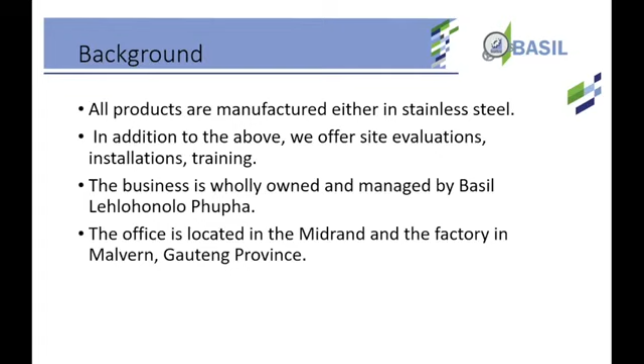I will go into the equipment and the opportunities there for the youth, because this equipment will unlock opportunities for youth, so that it can be demonstrated through agricultural institutions, self-help schemes, or through entrepreneurship.

I will start by presenting the poultry equipment that we manufacture. I will break it into three categories: breeding of poultry, egg production, and meat production.

In breeding equipment, we manufacture nest boxes placed in the breeding houses, and we also supply feeders and drinkers placed in the breeding houses, so the hens or chickens can lay their eggs in a good environment, and the clean eggs can be placed for hatching.

We also manufacture egg incubators in small and medium scale. These incubators are manufactured in galvanized steel, powder coated after, and have insulation. We've been manufacturing this equipment for quite some time. I personally have over 10 years in the industry, but I have people with over 30 years in this industry, so they can assure the equipment does what it's supposed to do.

We also manufacture chicken and quail abattoir equipment. This equipment can slaughter up to 1,000 chickens per day, and even more quails per day.

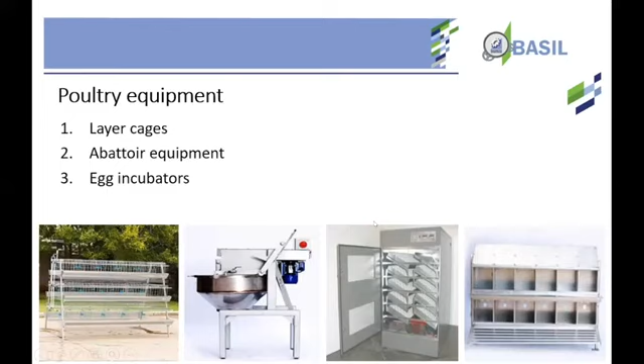I will play a small video clip that shows the chicken abattoir, the main equipment used in chicken abattoirs for small and medium scale farmers.

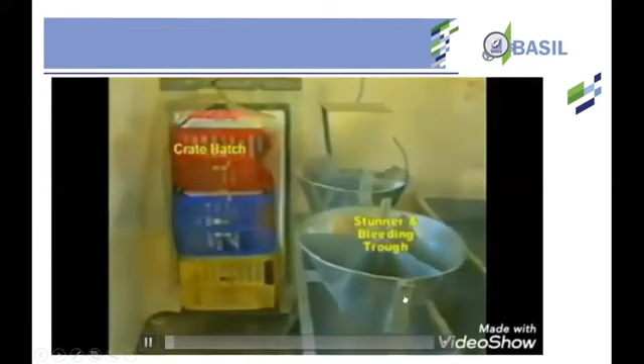So this is how the equipment looks. Here we have a stunner bleeder, a scalding tank, and a tilting bowl plucker.

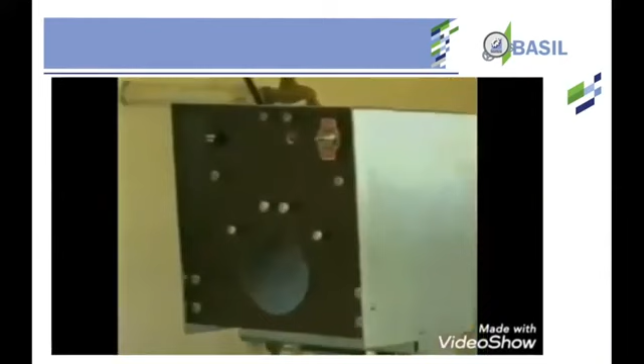The stunner bleeder is used in the chicken abattoir so that the chickens can be stunned. After they are slaughtered, they bleed out, and they can be scalded, and later on plucked to take the feathers off.

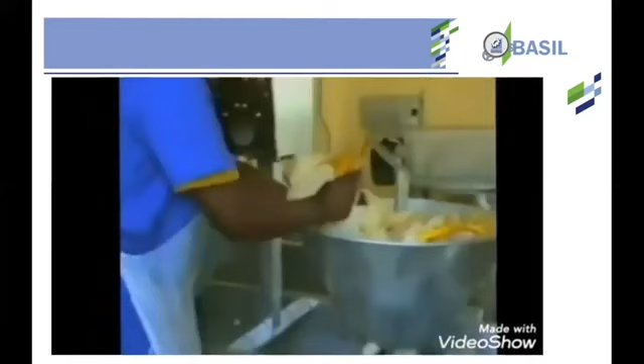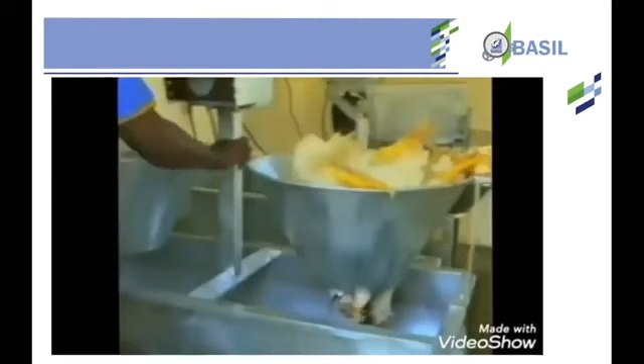So that lady is stunning the chickens and putting them in the stunner bleeder, then it goes through the process of slaughtering, and thereafter the chickens are placed in the scalder and then plucked.

We manufacture hygiene equipment too - boot washers, hand basins, and knife sterilizers. All this equipment is manufactured by us here in South Africa.

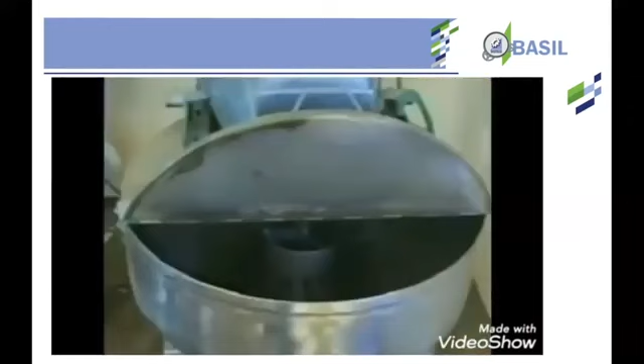This plucker is used to take the feathers off the chickens.

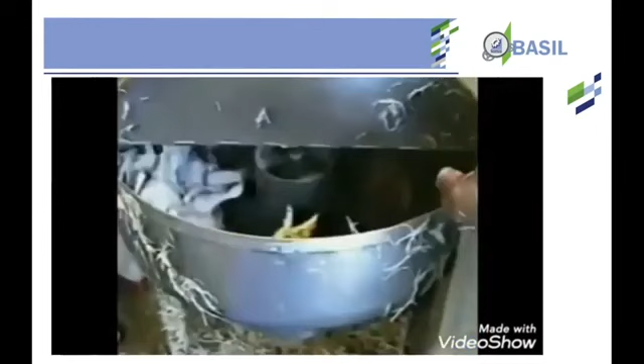After the process of plucking the feathers, the chickens go to eviscerating troughs to remove the intestines, then feather cleaning and washing, and they drip water from the drip cooling trolleys. After that, the chickens can be cut into portions and later packaged or put in cold or freezer rooms.

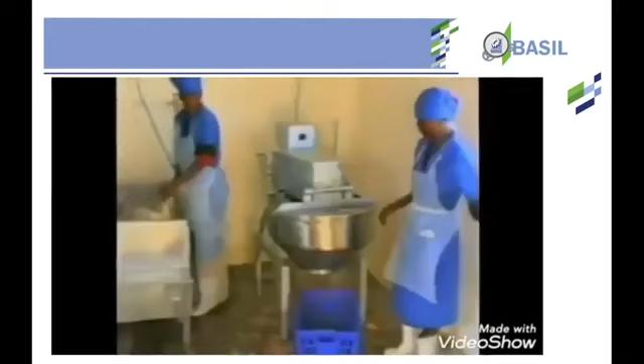This is our chicken slaughtering equipment available for youth who want to take advantage of this opportunity. The nice thing about an abattoir is it doesn't have to just be for someone using it for themselves - it can be used for other people as well.

It can be used in agricultural institutions to make sure training is conducted and farmers are trained on how to further process chickens, because most people are just raising chickens and selling them as live birds, but there's an opportunity to slaughter chickens and add value so they can be market ready.

So I will go next to fruit and vegetable processing. We also manufacture fruit and vegetable processing equipment, such as fruit juice finishers, pasteurizing equipment, and fruit drying equipment.

This equipment can be used to process soft fruits such as mangoes, marulas, guavas, and many more fruits, and also to process soft vegetables such as tomatoes and others.

I will play a small video clip of tomato processing where people use this equipment to make and create tomato paste.

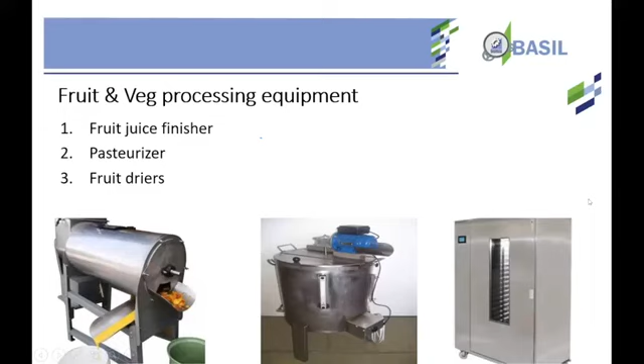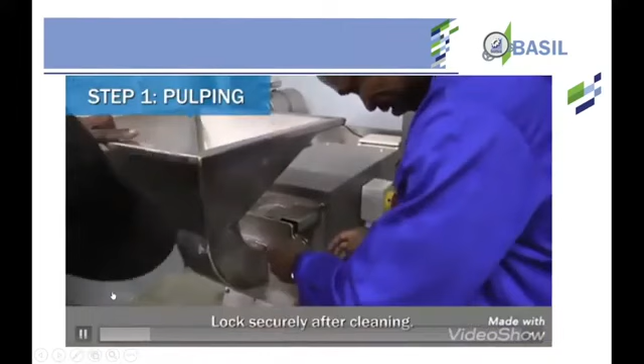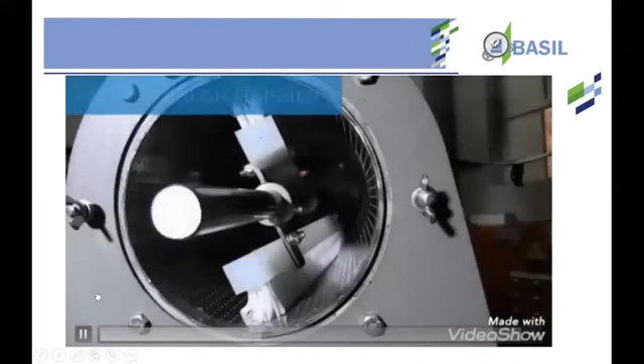So from the processing point of view of fruits, we manufacture the equipment from wash troughs to wash the fruits as they come in, sorting machines to sort the fruits, sorting tables, pulping machines, fruit juice machines, and brush finishers that separate the skins of the fruits or vegetables from the pulp. This brush finisher uses brushes, and we use different size screens to make sure that the type of fruit or vegetable you are processing is suitable.

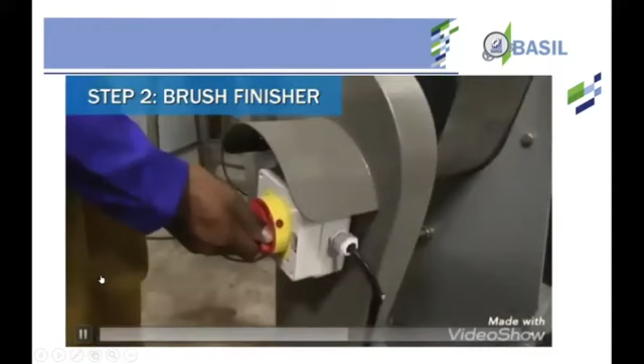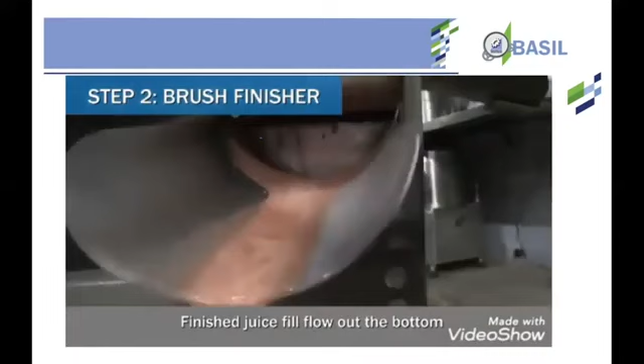We don't just manufacture one or two pieces of equipment, we manufacture the whole line so that we can tailor make according to your specifications and needs. We make sure our clients get the benefit of getting their desired end product. This is a video clip showing the juice separated from the tomato pulp, and the seeds and skins.

Furthermore, I will introduce our oil processing equipment that is being used in most countries like Namibia, Botswana, and Eswatini. This equipment is mainly used to process nuts and seeds such as marula, sunflower, moringa, and other types of seeds and nuts.

We've got the dehusking equipment for seeds such as moringa and peanuts, to remove the shells of the nuts before you can further process it. And we have the cold presses to extract the oil from these seeds. Furthermore, we've got the oil filter to purify the extracted oil.

This equipment we've just installed in Zimbabwe, where we installed a full operational processing house. They process marula fruits from washing and sorting, extracting and separating the skins and stones from the pulp or juice, up to filling of the final product. This is the oil processing equipment to extract marula oil from the seeds.

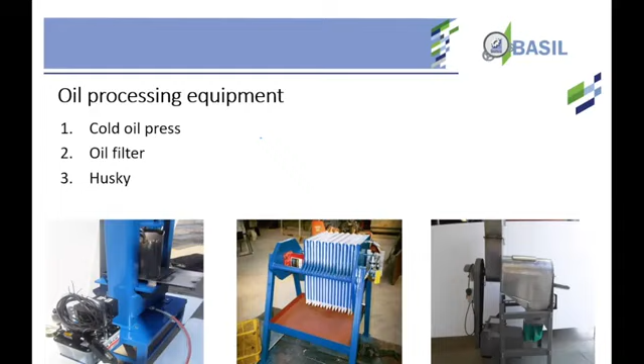I will just show you this picture of our cold press, used to press the seeds and nuts.

And we have peanut butter processing equipment to process peanuts from raw peanuts up to the filling of the peanut butter. We manufacture these peanut butter plants for small and medium scale farmers, entrepreneurs, or small businesses that want to get into the business of processing nuts to make peanut butter.

From roasting peanuts, dehulling peanuts, and the peanut grinder, to actually filling the final product into bottles and labeling them, we manufacture this small scale equipment.

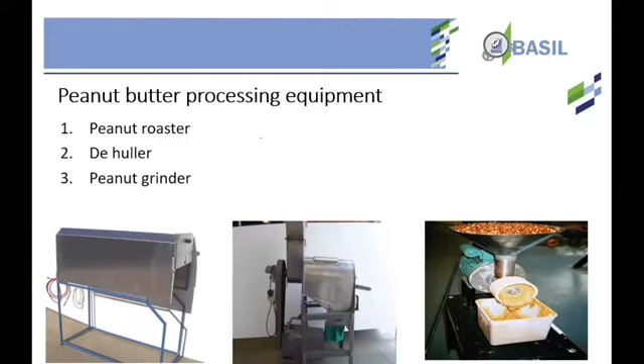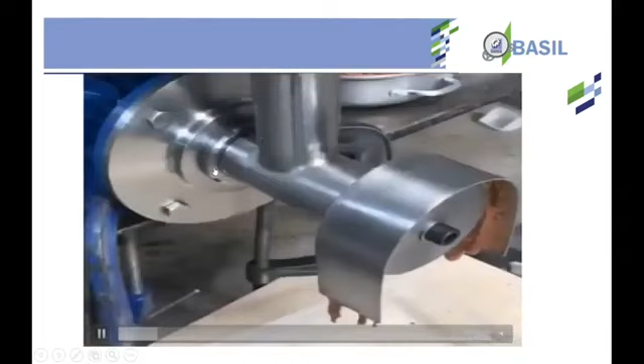This is just a short video clip of the peanut grinder. We just tested this, showing how the grinder actually grinds the peanuts to make or become peanut butter.

We've supplied these to various places in South Africa. There's a person manufacturing peanut butter from the Free State province in Bloemfontein, and there are people manufacturing peanut butter here in Johannesburg for the correctional services. They are using these machines to process the peanuts into peanut butter.

So Africa, I believe, has got enough fruits and vegetables to add value on.

The recent projects we've worked on include the tomato paste project in Eswatini, where people are making paste from tomatoes; the layer cages we supplied in Mozambique; the marula processing equipment we installed and commissioned in Zimbabwe; and the chicken abattoir equipment we supplied in Rwanda for our client, the Rwanda Institute for Conservation Agriculture (RICA). I still have to go there to install the equipment sometime this year.

I believe all this equipment will unlock opportunities for the youth, enabling them to be in the agricultural agro-processing space to add value to produce. Farmers who already have fruits and vegetables can process them, add value to their produce, make a living, and employ more people, including more youth, here in South Africa.